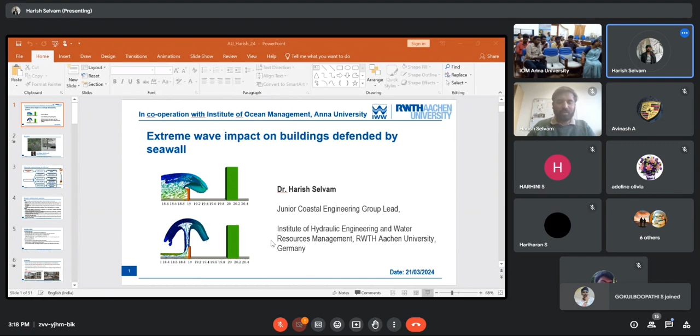Is it fine now? I'm in the presentation mode now. Yes, sir. The screen is visible. Do you also see my slide changes? Yes, the slide change is also clear. Is it working fine or should I make some changes? Sir, press F5 for slideshow. It is already in slideshow mode, but I'm not sure why. It is like when we open PowerPoint, that screen is only visible. I understand, maybe I'll do it this way. Okay, sir.

What about now? Yes, sir. Now it is clear. Super. Okay, ma'am, can I start or should I wait? Yes, sir. You can start. Okay, super. Let me start.

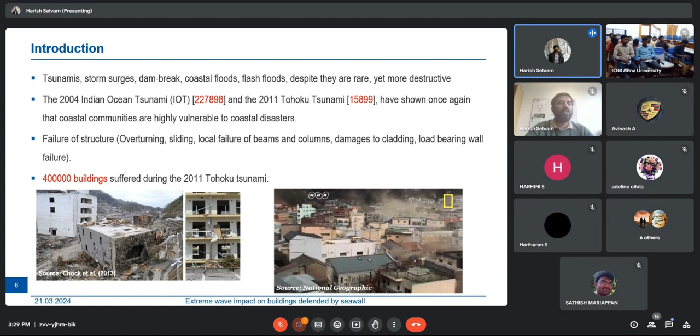You could also see here that in the 2011 Japan tsunami, almost 400,000 buildings were completely demolished or damaged with severe structural failure. If such buildings were designed for such a huge hydrodynamic load, people could have sought shelter on their rooftops and saved their lives, but it was not the case. That's where my PhD topic arises. I was working on understanding tsunami interaction with buildings.

In addition, part of my research focused on identifying better solutions to reduce the forces acting on the building, because one cannot design a building for a 10-meter inundating tsunami bore or a tsunami flow velocity of 10 meters per second. That would result in practically impossible construction. That's why we should also think about protecting our coast in a better way, so that buildings experience the least force. Of course, you cannot build a 10-meter seawall everywhere to protect your entire coast from tsunamis. So that's where several solutions came up.

The solutions include improving the seawall design for reducing tsunami inundation, or growing green, like growing vegetation at the coast. If you have a mangrove forest at the coast, it would facilitate the reduction of wave energy, because mangroves in the past were able to successfully reduce tsunami energies. One could also think about integrating several solutions, like integrating an existing coastal protection structure such as a seawall with soft vegetation methods. That would give a double defense to your coastal region.

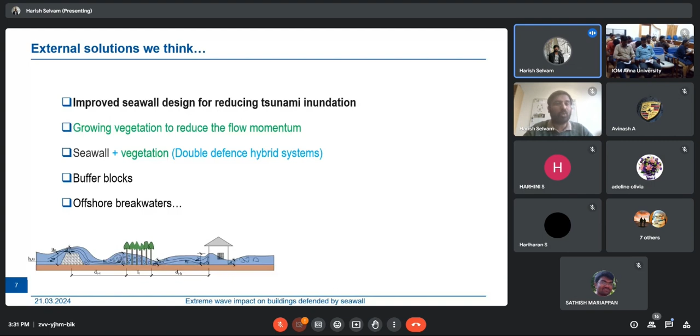But the cost of such a solution is that you need sufficient space to implement it. For seawall implementation you might need 10 or 20 meters, and for vegetation you might need 100 to 200 meters in order to effectively reduce the tsunami inundation.

But one should also not forget that, for example, you cannot do this at the Marina Beach, because the Marina Beach is actually known for its aesthetic beauty. But when you start building such structures with a view of protecting against tsunamis, then there will also be additional conflicts at the coastal regions.

But anyway, in addition to that, there are also several possibilities, for example, introducing buffer blocks. These buffer blocks do not need to be constructed so tall, but they can be of smaller height. But when you construct them in rows, something like this here, they would effectively reduce the inundating tsunami energy. So that is another concept. In addition to it, we could also think about offshore breakwaters.

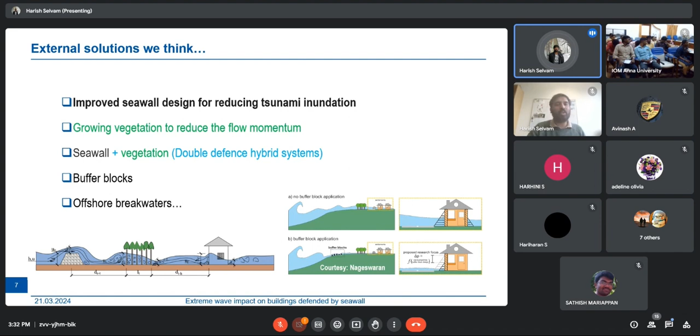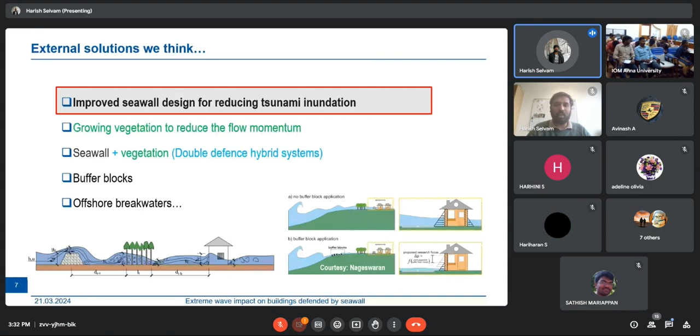So several solutions are possible, but one solution which I was more interested in is trying to understand the existing seawall or maybe the new seawall designed for reducing the tsunami inundations. Although, in the video, you might have seen that the 18-foot seawall was overtopped by huge tsunami waves, even in the overtopping conditions, past studies showed that they still offered sufficient protection to the coast. For example, they reduced the loading on the building. That was observed in the past literature by these two people.

So now you can imagine that a seawall located at the coast has an efficiency to reduce the tsunami force. It is not completely eradicating, but just reducing. So when you think about seawalls at the coast, we could think about a simple vertical seawall, something like this, or maybe introducing some parapets at the top.

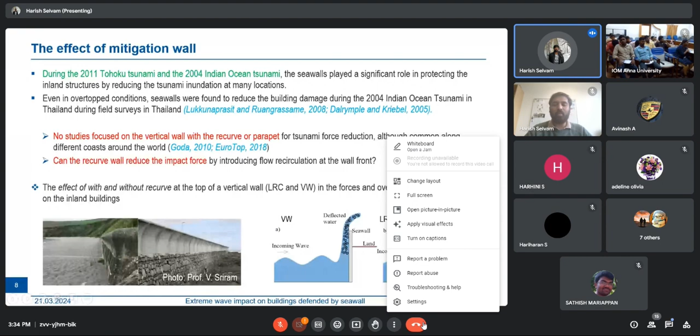Introducing parapets or a recurve on the top is usually preferred, because for a normal wave condition, the recurve helps in transferring the deflected wave directly to the sea. That way, wave overtopping, which is a major problem at the coast, is reduced. But nevertheless, there is no study which focused on what happens when you have a recurve during tsunami-like conditions. So there came my study of trying to first understand what happens with a vertical seawall and a vertical seawall with a recurve at the top on reducing the forces on the building behind. This is a part of my PhD work.

And when you think about simulating tsunamis in the laboratory, people thought of different technologies. For example, one could simulate a tsunami by sliding blocks, using long wave generation facilities, or using the dam break technique, where people store a significant amount of water and then simply release it so that it resembles a tsunami inundation. And there are other techniques like vertical release or suction pressure methods.

In our institute, we have a pump generation facility, wherein you have control of the discharge generated in the flume. In our experimental laboratory we could also generate bores of different conditions by varying the still water depth representing the coastal region. But in this specific study of extreme waves defended by seawalls, I used the dam break technique, which was conventionally adopted for generating tsunamis.

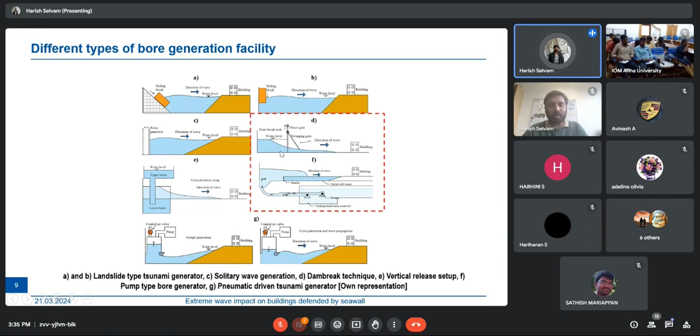For doing that, I used a numerical tool called OpenFOAM. Many of you might know it already, or maybe it's something new to you. OpenFOAM is a flow solver for the Reynolds-averaged Navier-Stokes equations, used to solve fundamental fluid dynamics problems. In this specific case, I used a solver called interFoam, which basically simulates free surface flow consisting of two phases. For example, here you have water as well as air, so two phases acting together.

When it interacts with the building or the seawall at the coast, you also have aeration, so it makes sense to introduce two-phase flow in this simulation. In addition, it is also necessary to use a turbulence model, because the inundating bore has a huge Reynolds number. In this specific case, I used the realizable k-epsilon turbulence model, but several turbulence models are available in OpenFOAM. I do not want to go into detail about OpenFOAM, but I would like to show a little bit about the numerical domain we chose.

So the numerical domain we chose is basically something which is representing our newly constructed dam break setup at IIT Madras, wherein one can store a huge amount of water behind the gate, and once you want to generate the bore, the door would be suddenly opened, and the dam break surges inland and then interacts with the structure behind.

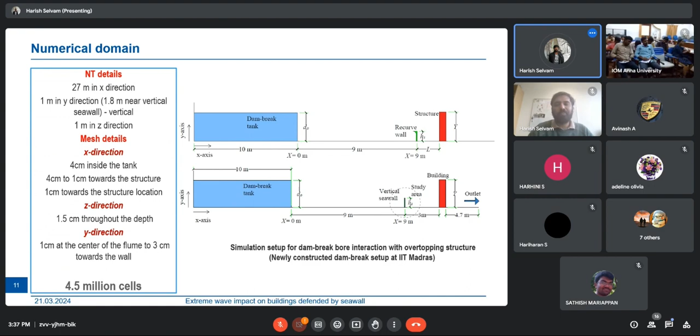So with this confidence, I went with the same numerical domain settings to a new domain, where you could imagine that here you have a mitigation seawall, which represents what I wanted in this study. And then there is a building behind this mitigation wall, or the vertical seawall. So this represents more or less what I really wanted.

So I chose this experimental domain, and here this orange one represents the dam break tank, and the dam break is allowed to flow, and you could see some nice flow interaction with the building models at the different phases of tsunami interaction. First, when the tsunami wave is approaching towards the seawall, it is deflected directly on the building, and then later it forms a kind of transition phase, wherein aeration as well as water reactions play a major role, and then finally you will have a quasi steady flow, which is more or less a steady inundation.

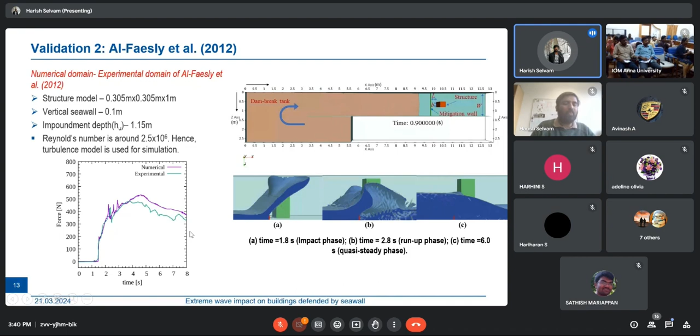So in order to effectively say that my prediction is working fine, I compared the force time history measured in the experiments and the numerical domain. So you could find here that the impact phases and the transition phases as well as the quasi steady phases are captured more or less fine. So by that way, I validated my numerical settings.

So this is basically the simulation protocol. The highlighted colors here in green are what I call small seawalls, the seawalls which have smaller heights, and then wall 4 to wall 5 I call medium height seawalls, and wall 6 and wall 7 I call large seawalls. And I conducted experiments with two different impoundment depths. By impoundment depth, I mean the height inside the dam break tank.

So also I varied the distance between my seawall and the structure, and I tested two different configurations. One is a vertical wall, and a vertical wall with a recurve on the top, which is represented as LRC. So when you think about a vertical wall with a recurve on the top, people should also think about the size of the recurve, which in general is not yet finalized. That means we have to choose a realizable value. So I chose the realizable value of 0.305 based on our previous experiments with normal wave interactions.

In future I also focused on trying to understand how different sizes of recurve influence the forces on the building, but I will show that a little bit later. So herein I non-dimensionalized the height of the seawall with this equation, h wall equal to h 1.3 Fr plus 1, which is the minimum height of the seawall required for the waves not to overtop. So I need to have a minimum of this much height in order to say that my seawall completely reflects the incoming tsunami bore without allowing any overtopping.

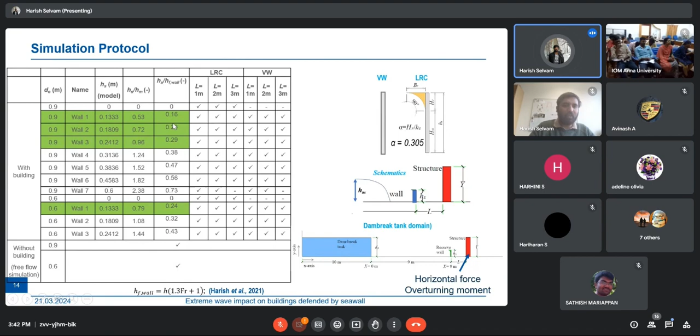So I non-dimensionalize it so that you can now realize that in this case 0.16 means the height of the seawall is just 0.16 times the minimum height required for the waves not to overtop. So that way I tested for different overtopping conditions, as you could see here.

So now let's also check. For example, this domain is completely new. Although I validated my numerical domain, I also need to first conduct some mesh sensitivity analysis. So I tried different mesh settings, and you could clearly find, especially during the impact phase, there is a large problem, because the flow is getting thinner and thinner when it approaches the coast, because I made the tank 9 meters away from the recurve wall, so my flow would be thinner and thinner, as you could see in the next simulations which I would show.

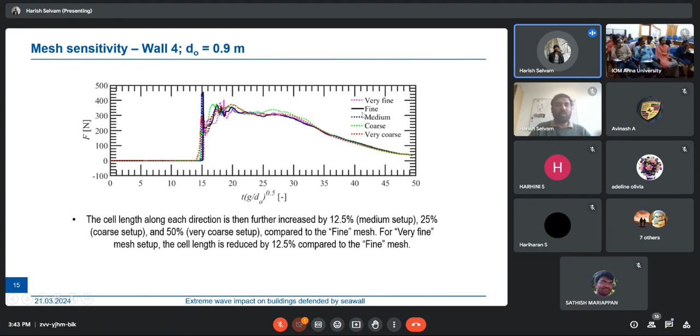But in the case of other phases of forces, for example, during the continuous bore inundation of tsunami, you can clearly observe that there are not much variations in the forces. So I choose this fine setting. The fine setting is the one I showed here, in the numerical domain details.

So, in addition, I also focused on understanding the effect of recurve sizes on tsunami forces, because this is really important, because we currently do not have any knowledge of how large the recurve size should be. So I tested with different recurve sizes. Alpha here represents the height of the recurve divided by the height of the seawall, for different conditions. And one important observation I made is that here also only during the impact phases the forces vary, but in the other phases the forces don't vary much.

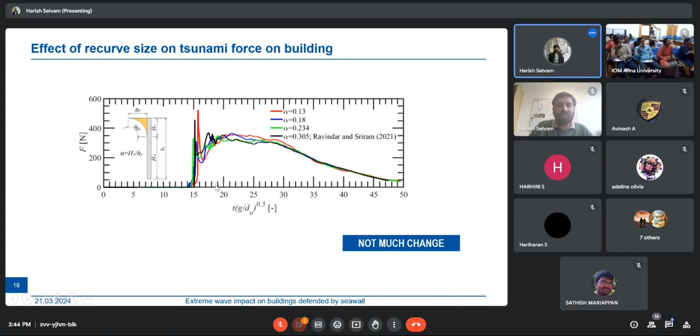So I also started focusing on the quasi-steady flow phase, for the simple reason that this is an idealistic condition, but in reality, behind the seawalls you might have some trees, or maybe some service roads, or maybe some bridges which would obstruct the initial impulsive force, but not the quasi-steady phase. So my study was completely on this specific region between 16 to maybe 30 in the non-dimensional time space. And let me quickly go to the results and discussions.

So I hereby also present a nice simulation video with the recurve and the vertical wall. You could find here that with the help of a recurve, the incoming wave is kind of reflected back into the sea. But in the case of the vertical wall, the wall first deflected the incoming tsunami bore into a kind of splash-up, and then the splashed-up bore falls on both sides and interacted with the building.

And you would have also identified, for example, in the case of a vertical seawall with a recurve on the top, the time of interaction with the building is increased compared to the vertical wall. So the vertical seawall did not change the time significantly. That is something you could also observe here. LRC is represented with the red line, the gray line is the vertical wall, and the black solid line is the no-wall condition.

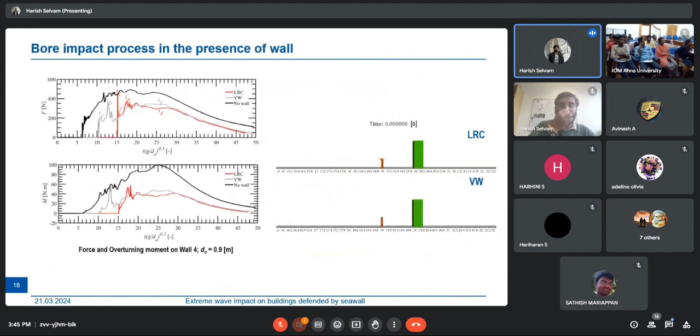So when you have a seawall, you will also have a false sensation that the seawalls would increase the time for evacuating the people. But in the case of the vertical wall, one could clearly find that even with the increase in the height of the seawall, there was not much increase in the time period for people to evacuate.

But in the case of a large recurve wall, you could find here that with the increase in height of the seawall, the time period of interaction with the building increases, which indirectly means a larger time period for the people to escape. So that means you could partially imagine that this LRC is performing better than a vertical wall, as you could find here in terms of time of interaction.

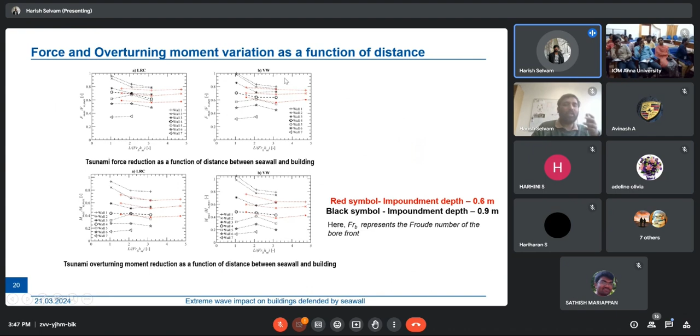But as I also said, I varied the distance between the building and the seawall, and also I varied the height of the seawall. At first, I tried to identify the effect of the distance between the seawall and the building, and you could identify, especially for the smaller height seawalls, that the reduction of forces was not so appreciable.

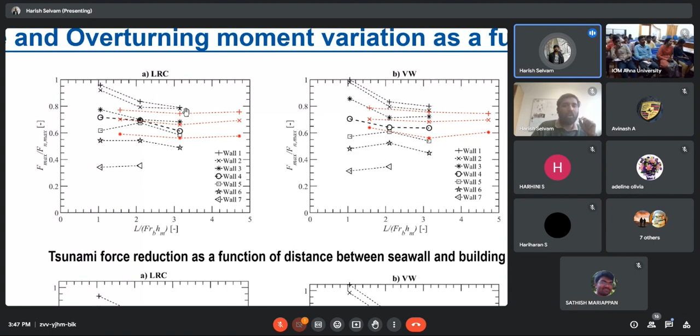So here I non-dimensionalized the forces by no building conditions, and you could identify only 4 to 5% reductions in the case of even LRC. But when you keep it far away, here L represents the distance between the building and the seawall, even the same seawall height was able to reduce the force by 20%. So you could now imagine that you need to set up a minimum distance in order to enjoy the benefit of a seawall.

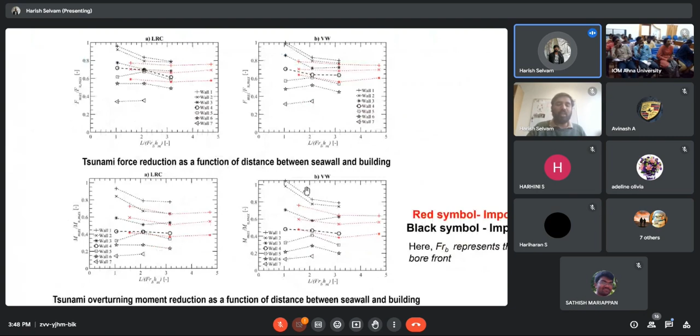But with the large height seawalls, this effect was not so predominant. So the effect of the distance between the seawall and the building plays a major role only in the case of low-rise seawalls. Similarly, it was also observed in the vertical wall, and here you could observe that in fact no reduction in the force was observed for the low-height seawalls. And in some cases, I observed that the overturning moment was in fact higher than the no seawall condition. So it is performing negatively. That's why we have to keep a minimum distance between these two.

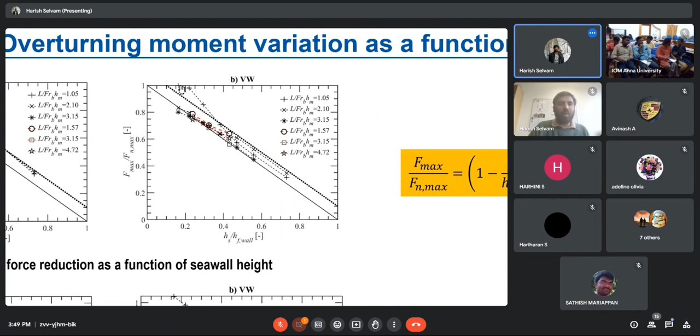But besides that, I tried to also arrive at some empirical equations for the designers, so that they can use this for designing coastal buildings in future if they have a seawall in front. So here the force has been similarly non-dimensionalized with no building, no seawall conditions, for the varying height of the seawall, and one could find that the forces more or less linearly decrease with the increase in the height of the seawall. In the case where the distance between the small seawall and the building is not so appreciable, the forces in fact were not even reduced. And similarly for the overturning moment, I propose some empirical equations.

I know that now I have been speaking for a long time, but I also wanted to have your opinion: which one do you think is performing better, the vertical seawall with the recurve on the top or simply the vertical wall? So from the audience, I hear it's the vertical recurve wall that is functioning better, sir.

Okay, nice. So let us also try to understand what happens exactly on the seawall. Now we understood the effect of the seawall in reducing the forces on the building. Let's also try to improve our understanding of the seawall itself. As I said, when the bore interacts with the seawall, you initially have a bore impact, then there is a reflection phase, and then a continuous quasi-steady force applying on the seawall. In fact, it is the same for the building too.

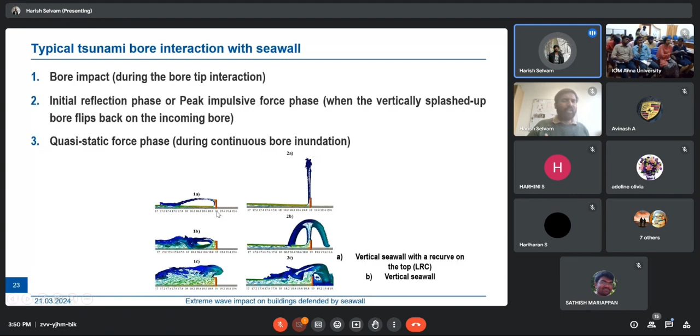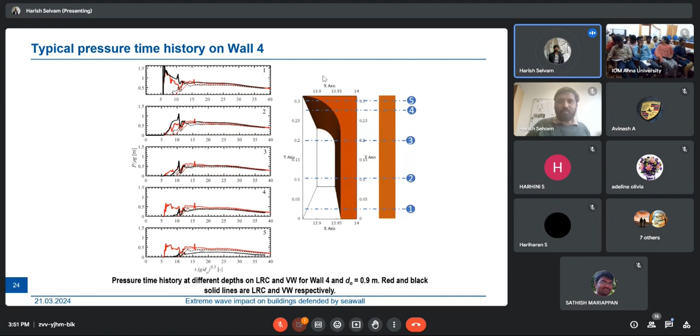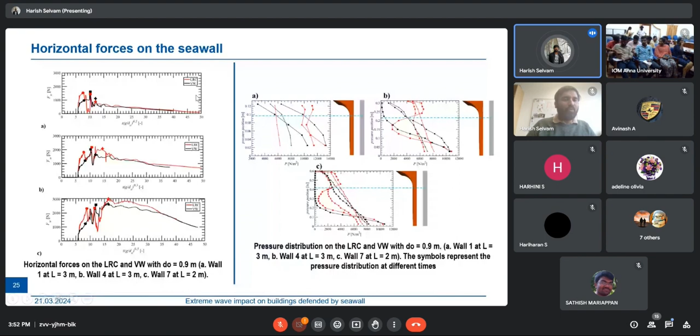So let us also try understanding the horizontal forces acting on the seawall itself. For better understanding, I also present here the pressure over the entire depth of the seawall. The red lines here are the vertical wall with the recurve on the top, and the black lines are simply the vertical wall. This is for three different wall conditions: wall 1, wall 4, wall 7. You could identify here that the LRC is experiencing significant forces in the horizontal direction for all the three seawall heights.

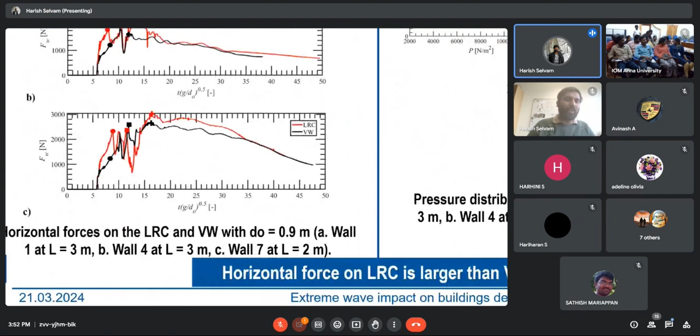But when you also increase the height of the seawall, the difference between the forces acting on both of them is not so appreciable. But in the case of low rise seawalls, the LRC is experiencing a significant force, especially during the initial impact. And in fact, it was also the same observations made for the medium height seawall.

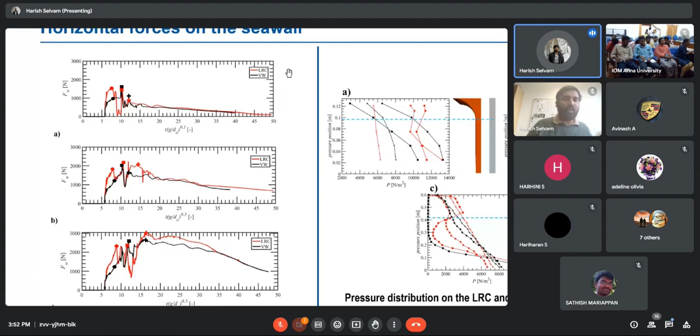So that means here, simply you could understand that the forces on the vertical wall with the recurve on the top are maybe 1.4 times higher than the vertical wall itself. So that means LRC is experiencing a large force in order to reduce the forces acting on the building behind. But you could also recollect a little bit that the reduction in the forces between the LRC and the vertical wall was not so significant.

Of course, LRC was performing a little bit better, but not so significant. But the amount of force which it experiences itself is really, really high. So in fact, you could observe here that at the recurve portions especially, the pressure is really, really high compared to the vertical wall wherein the pressure is really low.

So in addition, you could also observe here that in the case of low rise seawalls, you have maximum forces during the impulsive force stage. But in the case of high rise seawall, you have maximum forces during the quasi steady flow phase. So that means I also need to identify why it is happening such a way. So that's why I plotted here some of the flow interaction processes in the quasi steady flow phases especially.

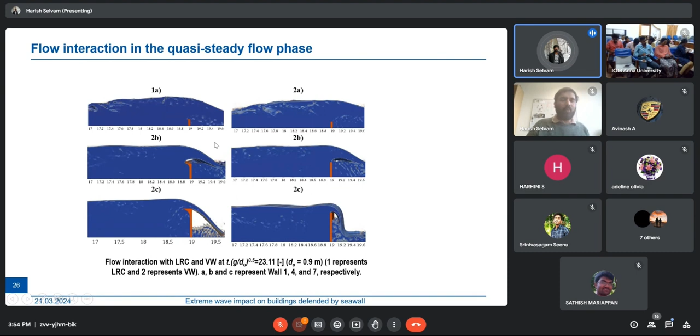Here you could identify that with the increase in the height of the seawall, the water level differences between the frontal side and the back side are getting larger. So that means you have a large pressure acting on the vertical wall or a vertical wall with a recurve on the top when you have a larger height.

But in the case of low rise wall, it is completely overtopped. So the pressure acting on the frontal side is compensated by the backside pressure. So you have only hydrodynamic forces happening on the low rise seawall. So that was the reason why these small rise seawalls are experiencing the maximum forces during the impulsive force stage.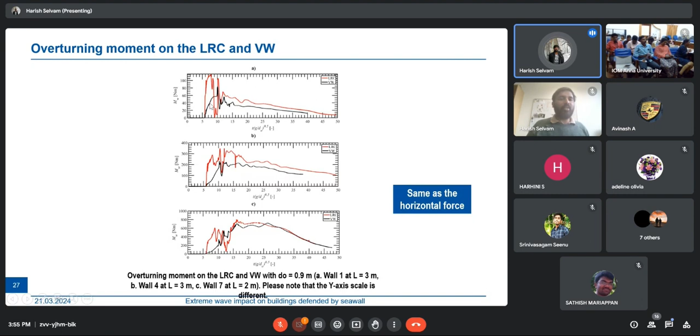But in addition to it, the LRC has some projection. This recurve has some projection. So because of this projection, there is also an uplift force happening on the recurve. So I also plotted some of the uplift forces that are happening for different heights of the seawall. You could identify that with the increase in the height of the seawall, the recurve wall is experiencing more uplift force during the quasi steady flow phase.

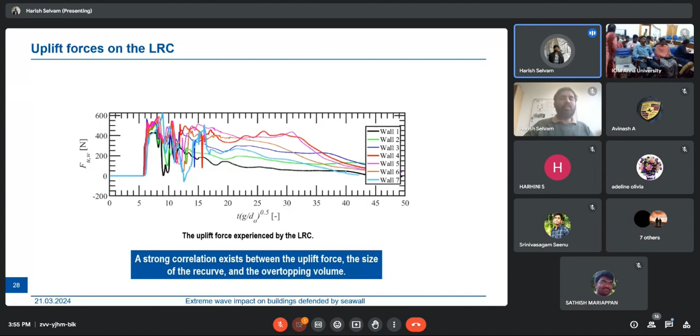But with the further increase in the height, the forces are once again getting reduced. This is because it has a strong correlation with the overtopping volume. For example, when you have a very high rise seawall, then the forces acting on the recurve portion are also getting a little bit reduced. And that's why we are experiencing a little bit less force when you go for very high rise seawalls.

And in addition to it, when you increase the height of the seawall, I also increased the recurve sizes proportionately. So that means my recurve size is also increasing. But for one specific case, I tried to understand how the recurve size alone for a single vertical wall really matters.

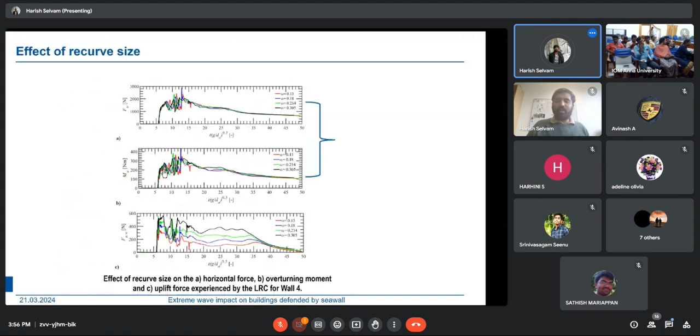So as I explained previously, I chose four different ratios for the recurves, but specifically, I observed that in the case of horizontal forces and overturning moment, the recurve did not significantly increase the forces, but the recurve itself is inducing some additional forces. And when it comes to vertical uplift forces, with the increase in the recurve sizes, my forces are also increasing.

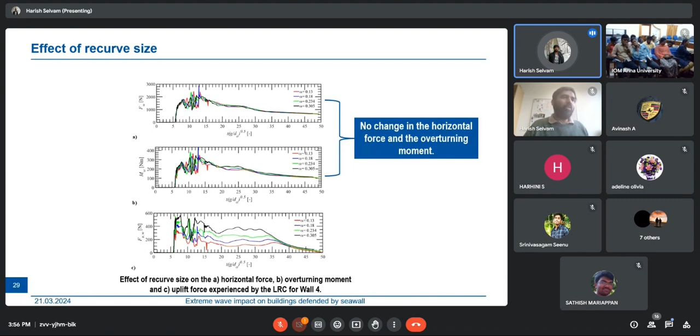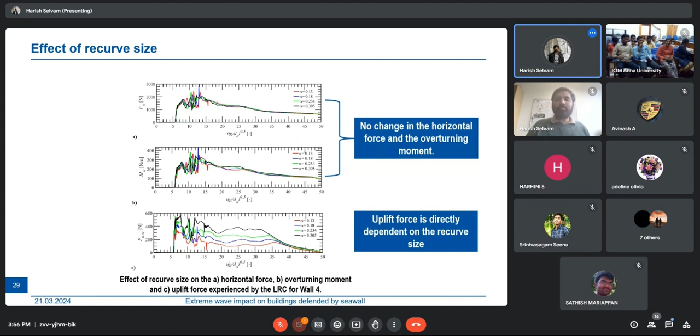So when you are choosing a recurve wall, one should be really careful about the size one chooses. So the least one should be adopted. Of course, one cannot design the seawall only for the extreme conditions. For the normal conditions, people also need to evaluate these recurve sizes, which has not been evaluated as of my knowledge. So this uplift force is directly proportional to the recurve size. So now the same question, which one is performing better? As an engineer, which one would you choose?

Sir, it's the same like recurve wall, but with like minimum size. Yes. To be also on the safer side, when you also have a little bit higher sea walls, we could still prefer a vertical wall alone, because of the projection from the recurve wall, it experiences some uplift forces, of course, which is a kind of destabilizing force for the structure.

In fact, even during the past tsunamis, what they observed after the field surveys is the vertical seawall with the recurve on the top experienced larger forces, and because of that, part of the seawalls, for example the recurve portions, were completely detached from the vertical seawall and transported. So one has to be really careful when choosing the size of the recurve, especially in areas where tsunamis are more prone.

So some key conclusions: with the increase in the height of the seawall, the forces of course reduce, and it also depends on the flow properties. We observed a linear reduction in the forces on the building, and a non-linear reduction in the overturning moments. And low-rise vertical seawalls sometimes actually have a negative effect, because when you keep it very close to the building, sometimes the building experiences more forces than without seawall conditions.

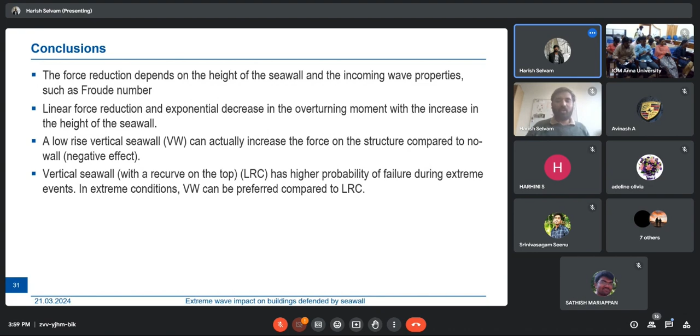In addition to that, I also focused on understanding how vegetation efficiently reduces the forces on the building. In fact, I also published it in a conference work. And the next step I still want to focus on is understanding how seawalls and vegetation together could reduce the forces on the building. This specific video I really wanted to show, because this is an experimental video which has been conducted in our institute in Aachen.

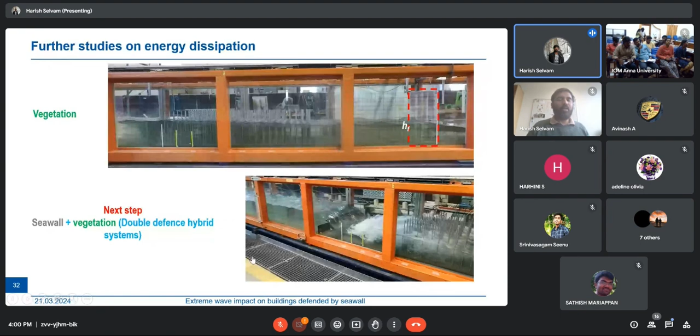And these are some publications which I have in terms of tsunami structure interaction. My entire PhD was on tsunami structure interaction, so I had a large number of publications on this specific topic. And I would like to once again say thank you all for listening.

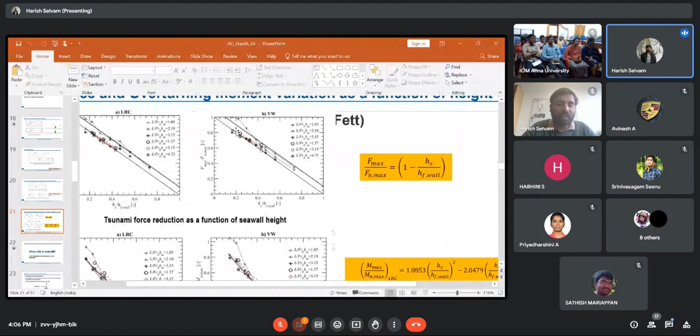In fact, that's what I also showed here. Maybe I'll present it once again. Yes, sir. Thank you. Is it okay? This is the one: in the case of very close seawalls, the forces go really high, sometimes even exceeding the no seawall conditions. So in these cases, it is better to avoid any construction of seawall.

Okay, sir. Is it fine? Can we go with one more question? Yes, of course. Can you suggest a code book for designing, sir? Okay, so a code book for designing.

Using materials also. So to my knowledge, in India we have some code books regarding tsunami interaction with shorefront structures, for example port structures, wherein people normally use the hydrodynamic force equation, force equals half rho h u squared. People suggest using that formula for estimating the forces on the building, but there are no well established code books.

But in foreign standards, for example the American standard ASCE 7, there is explicit treatment of minimum design loads for tsunami. There are also guidelines from FEMA for designing buildings at the coast. And as you might know, Japan suffers from tsunamis at frequent intervals, so they have internal codes. But even those codes suggest using hydrodynamic force equations for estimating the forces on the building.

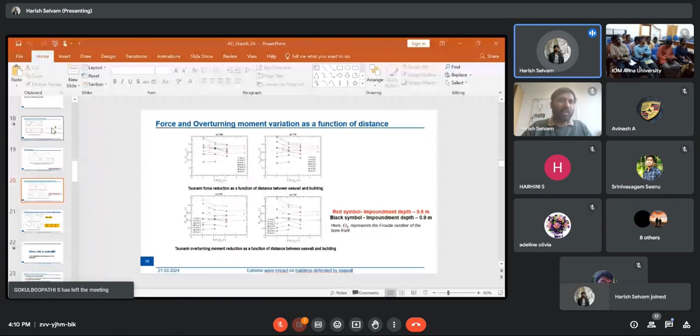That's actually a good question because choosing mesh size is really important. Otherwise, we will end up in a computational domain which is really computationally expensive, especially when we speak about Reynolds-averaged Navier-Stokes equations. For example, in the x direction, I chose 4 centimeters inside the tank and varied from 4 centimeters to 1 centimeter towards the structure, because in this portion, as you would have seen in my simulation video, the bore front is going very thin. In order to capture that, we need a smaller mesh size.

In the z direction I kept the mesh size constant, and in the y direction, since my building is of primary importance, I chose 1 centimeter at the center of the flume, and towards the edge of the flume 3 centimeters, because I really wanted to capture the process happening at the structure more precisely. Nevertheless, I arrived at these numerical domain and mesh details based on previous studies, wherein people use this stretching technique to model precise flow features, especially near structures.

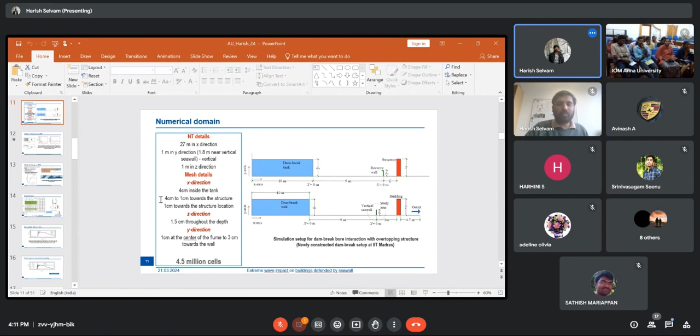Thank you so much, sir, for your time. The session highlighted all the important aspects of waves, extreme wave impacts, sea walls, tsunami wave forces on buildings, and recurve walls from the sea wall point of view. Thank you so much on behalf of the Institute of Ocean Management and the ENVIS EIACP Center for sharing this session; I think it could be beneficial for the students in carrying out their project works.